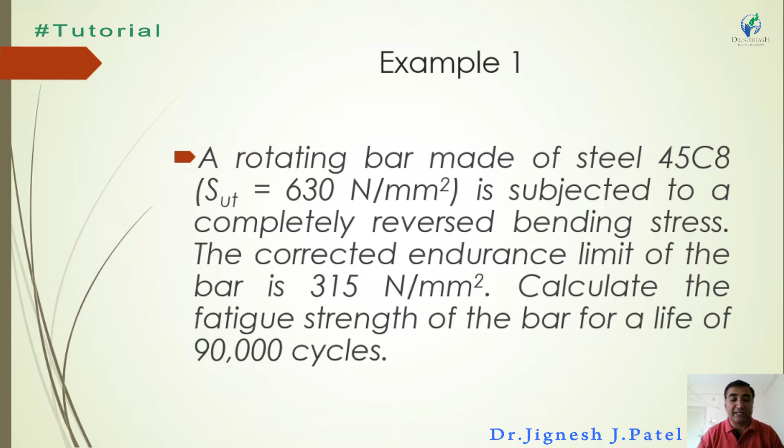A rotating bar made of steel 45C8 (Sut = 630 N/mm²) is subjected to a completely reversed bending stress. The corrected endurance limit of the bar is 315 N/mm². Calculate the fatigue strength of the bar for a life of 90,000 cycles. Okay. Let us solve this example.

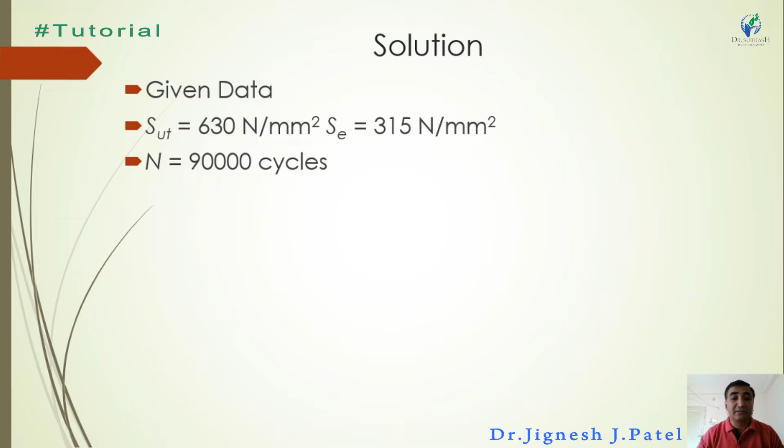First of all, the given data: the ultimate stress of the material is 630 N/mm², the corrected endurance limit Se is 315 N/mm², and the number of cycles is 90,000. Now step 1, first of all we have to construct the S-N diagram. So to construct the S-N diagram, we have to find the different values, in which first is

0.9 Sut. The value of Sut is given as 630, so 0.9 into 630 is equal to 567 N/mm². Now find log base 10 of 0.9 Sut. So log 567, this value is 2.7536. Now find out log Se. The value of Se is 315, so the value is

2.4983. Now log N, and N is equal to 90,000, so the value is 4.9542. Log 10 raised to 3 is equal to 3, and log 10 raised to 6 is equal to 6.

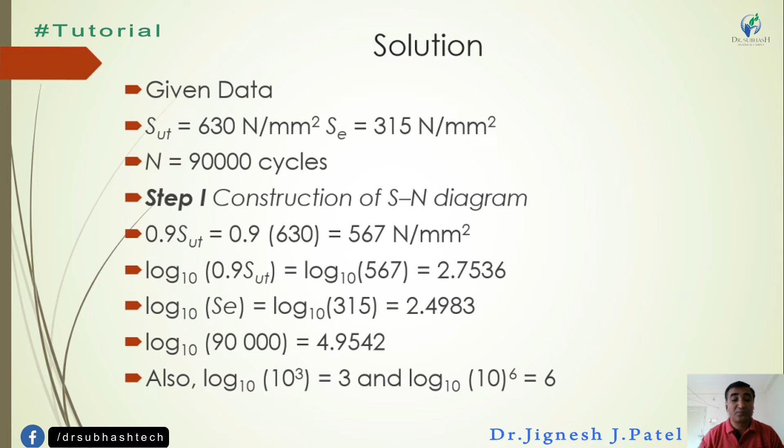Okay. Now let us construct the S-N diagram. How to construct the S-N diagram? You can see this is the S-N diagram, on which on the x-axis it is log N, and on the y-axis it is log Sf. Here at this point it is log 0.9 Sut, and the value is 2.7536. Here at this point it is log Se, and the value is 2.4983. On this axis it is 3, 4, 5 and 6.

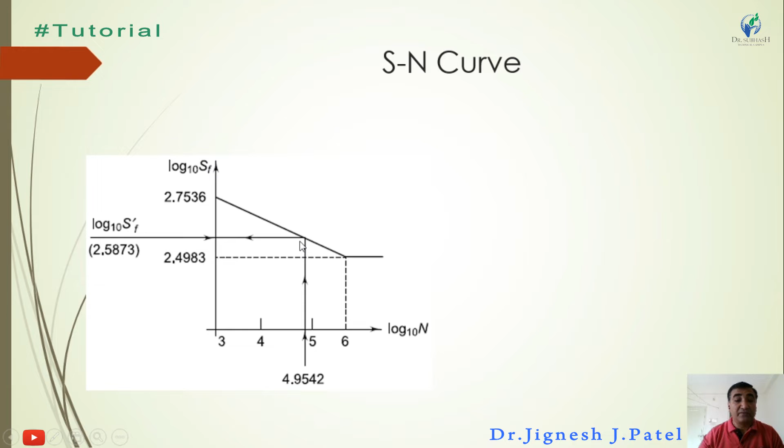Now the value of N is 90,000, so we have to find the corresponding value of Sf'. So step 2 is to find out the fatigue strength for 90,000 cycles. It is given by the equation.

Here you can see log Sf' is equal to 2.7536 minus (log 0.9 Sut minus log Se) upon (6 minus 3), into (log N minus 3). So the total value is 2.5873.

Now find out the corresponding value of Sf. Sf is the antilog of 2.5873, so the value of stress is 386.63 N/mm². So the fatigue strength corresponding to 90,000 cycles is 386.63 N/mm².

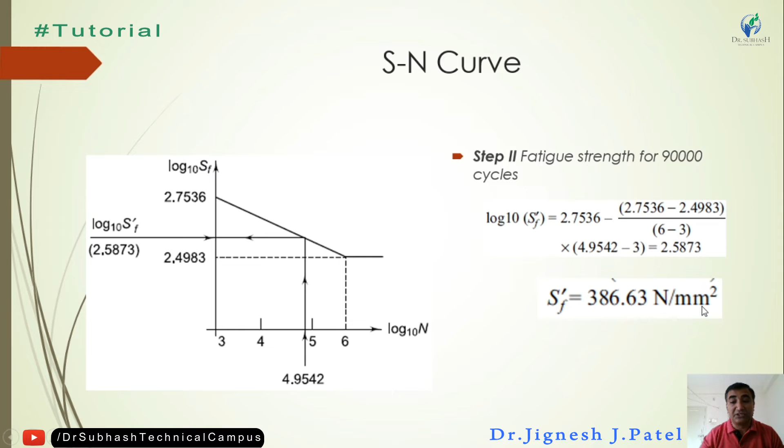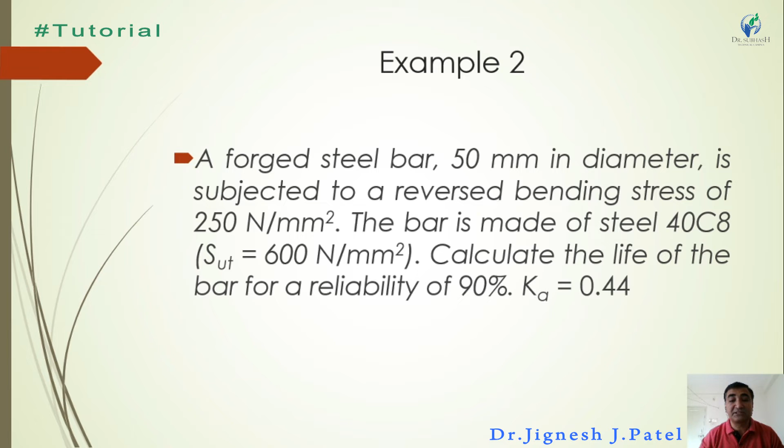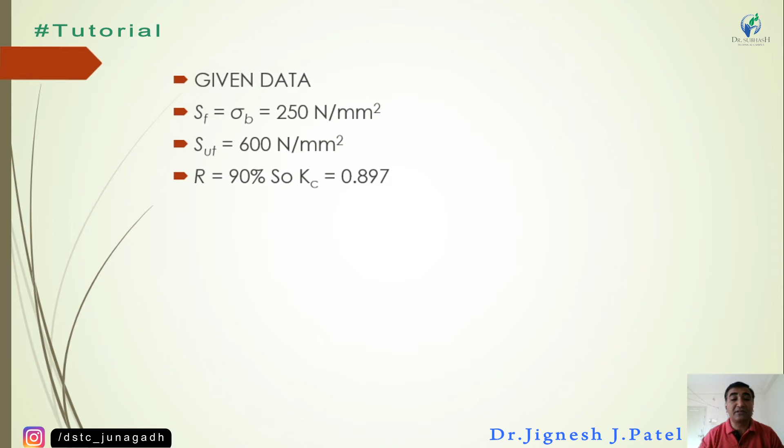First of all, the given data: Sf, or bending stress sigma b, is 250 N/mm². Ultimate stress is 600 N/mm². Reliability is 90%, so the corresponding reliability factor Kc is 0.897. Now construction of the S-N diagram. As per the previous example, let us find 0.9 Sut, then Se'. Se' is given by the standard value 0.5 Sut, so Se', the endurance limit of the standard specimen, is 300 N/mm².

Now for 50 mm diameter, the size factor Kb from the standard value is 0.85, and Kc is 0.897. Here the stress concentration factor is not given, so take Kd equal to 1. So the endurance limit Se is equal to Ka into Kb into Kc into Se'. Putting the values, Ka = 0.44, Kb = 0.85, Kc = 0.897 and Se' = 300, so the endurance limit Se is 100.64 N/mm².

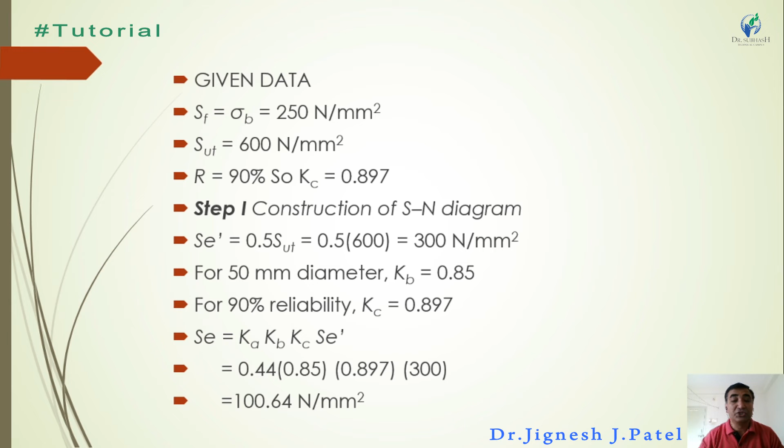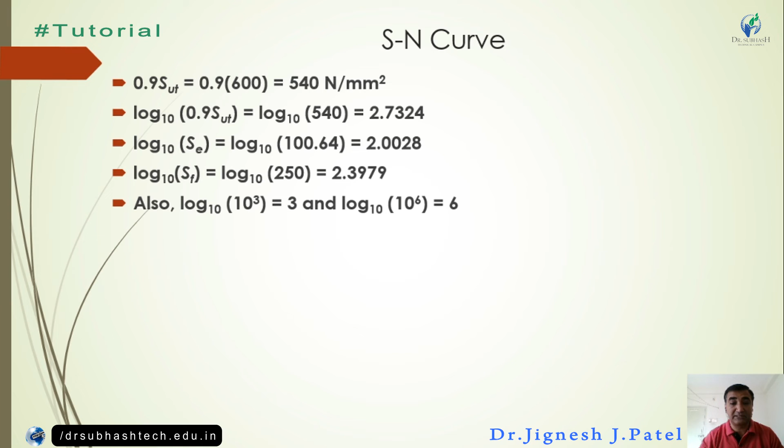Now construct the S-N curve. The required values: first, 0.9 Sut is 0.9 into 600, so 540 N/mm². Log 0.9 Sut is 2.7324. Log Se is 2.0028. Log Sf is 2.3979. Also log 10 raised to 3 is 3 and log 10 raised to 6 is 6.

Now in the similar triangles, we have to find EF, which gives log N. EF is equal to DB into AE upon AD. DB means 6 minus 3. AE means 2.7324 minus 2.3979, and AD is 2.7324 minus 2.0028. So the value of EF is 1.3754.